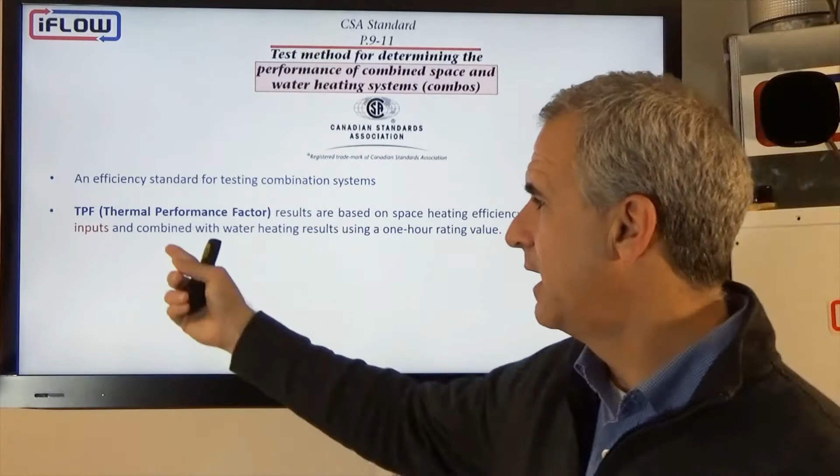First, we'll look at the Canadian test results. In Canada, the CSA has developed a standard for testing combination systems called the P.9-11 standard. It issues a TPF, or thermal performance factor, as a result, which is a weighted value of 3 numbers on the heating side, combined with the domestic water side using the 1 hour rating to give you a combined efficiency number.

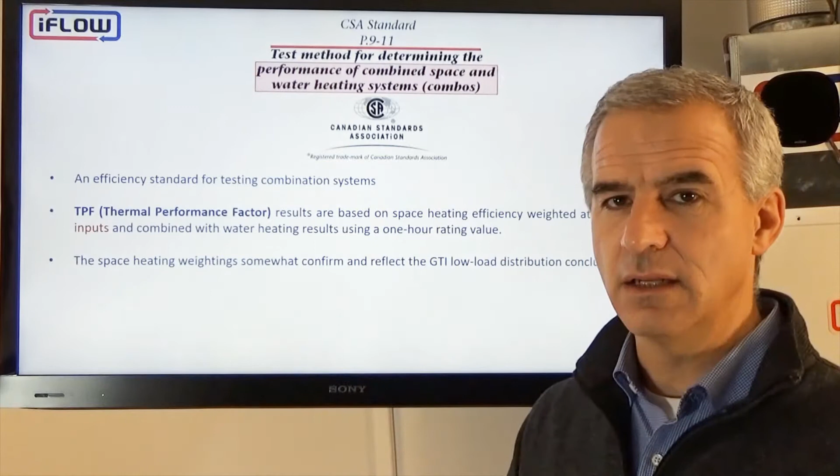So the space heating weightings somewhat confirm what GTI and Natural Resources Canada indicate about distribution and heating loads, in that the efficiency scored when we're running at 100% only weighs for 10% of your total score, because the unit's rarely going to run at that input, since it's so high.

The efficiency that we scored at 40% equates to 60% of our score. So again, we're saying we're going to be running at 40% of our input the majority of the time. And when we're running at very low loads, so 15% of our heating capacity, that will account for 30% of our score. So 90% of our score is below 40%.

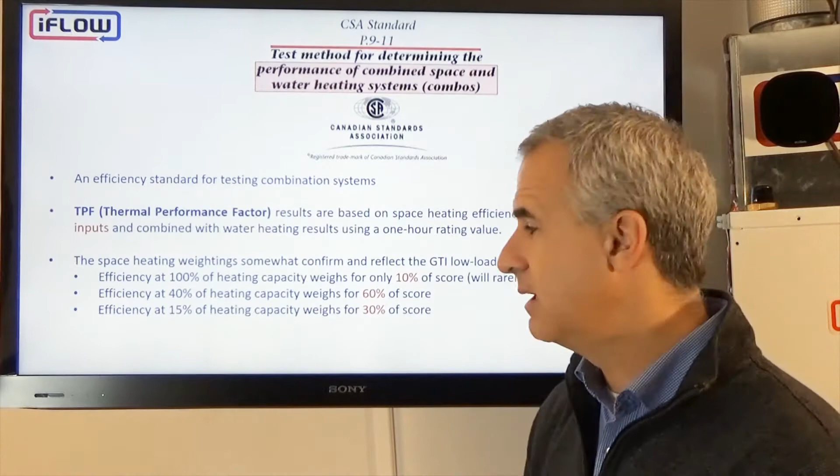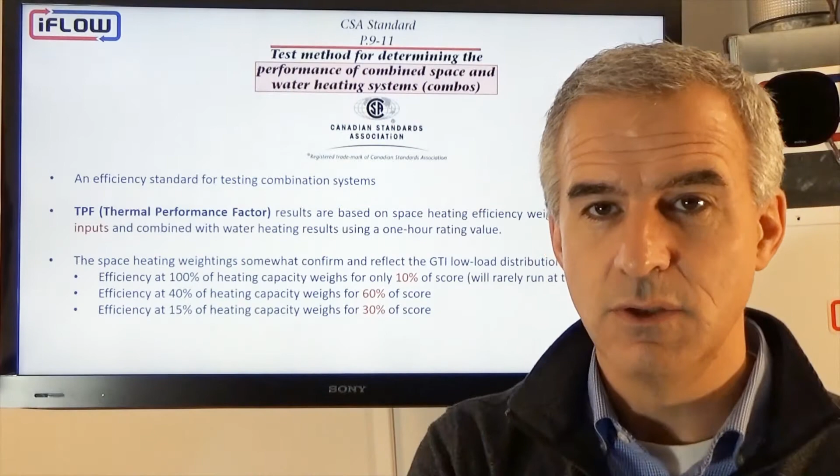40% of a 60,000 BTU furnace, which is the #1 selling SKU in North America, is 24,000 BTUs. So the majority of our score is calculated at 24,000 BTUs and below. This does confirm the GTI numbers, and it does reflect the numbers in the studies put out by the Canadian government.

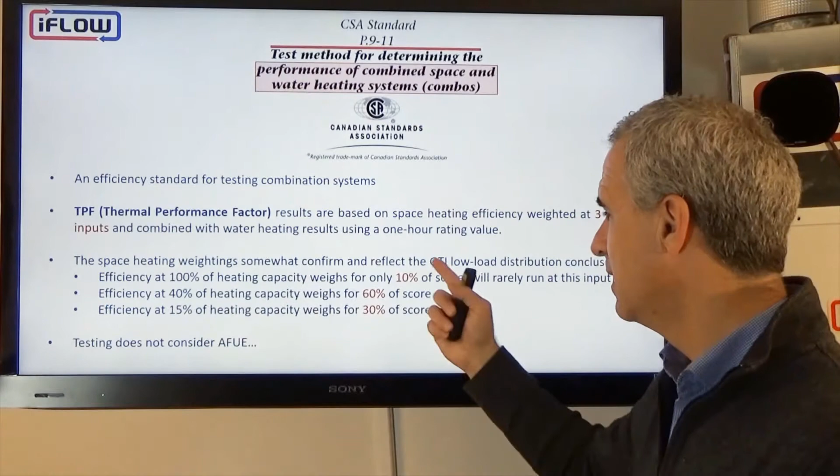So all to say, the TPF number is a balanced weighting of these three scores plus the water heating side. We do not consider the AFUE number much. If you wanted to consider running at 100%, that only weighs 10% of the score. So in these results, iFLOW scored 4 of the top 6 results.

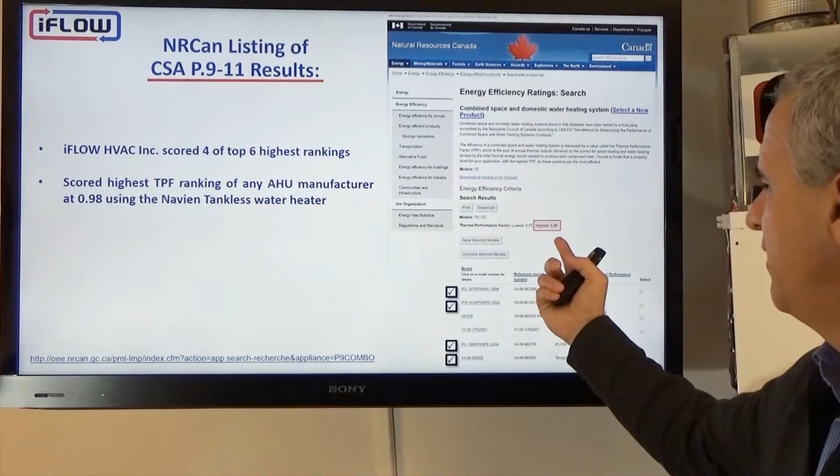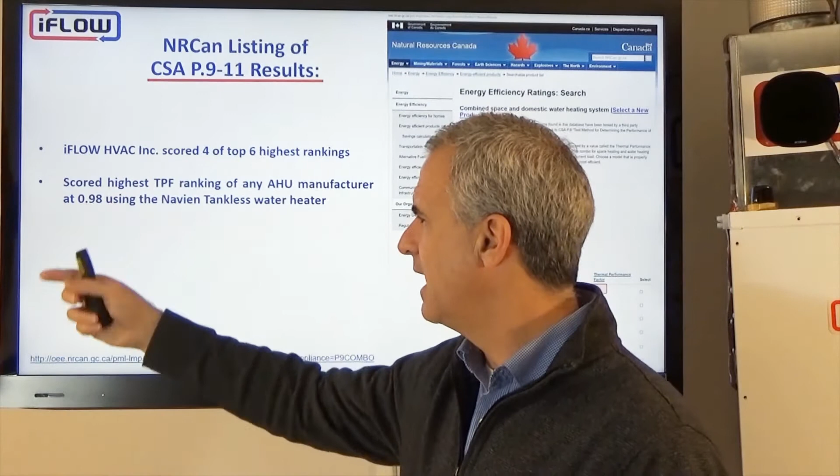We scored the highest TPF of any manufacturer in North America. This is a TPF of 0.98, and that was our score with the Navien tankless, the NP 180A. We scored a 0.98, or roughly 98%, with the Navien NP 180A model.

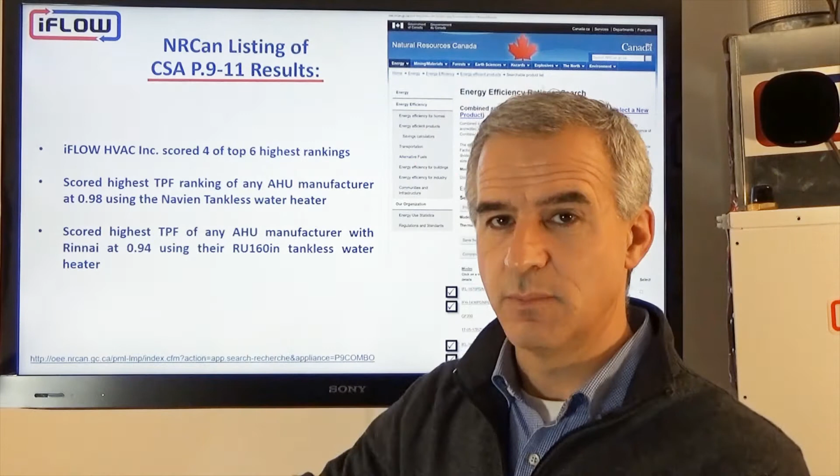We scored the highest TPF of any air handler manufacturer with Rinnai. We tested with their RU160IN model and scored a 0.94, again the highest of any manufacturer in North America. So not only did we score the highest of any combi system in North America tested to the P9 standard at 0.98 with Navien, we also scored the highest with Rinnai of any manufacturer. We're pretty happy with those results.

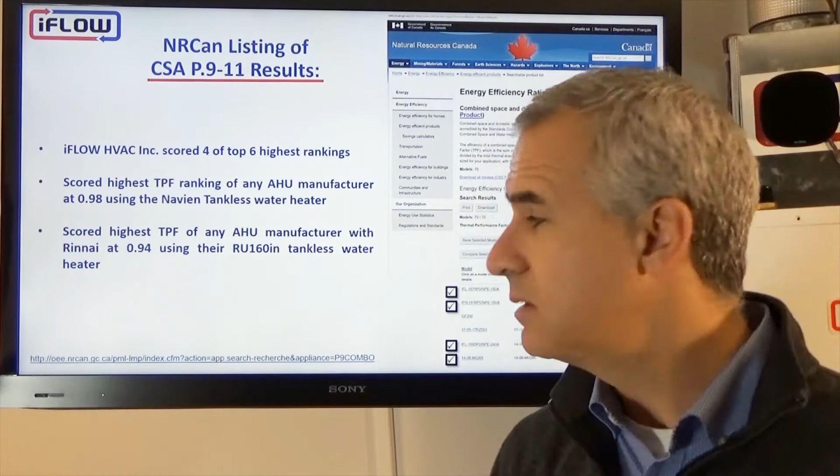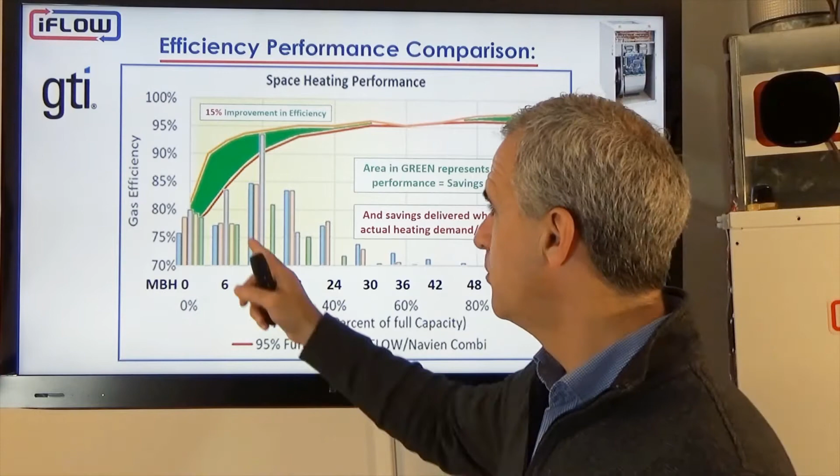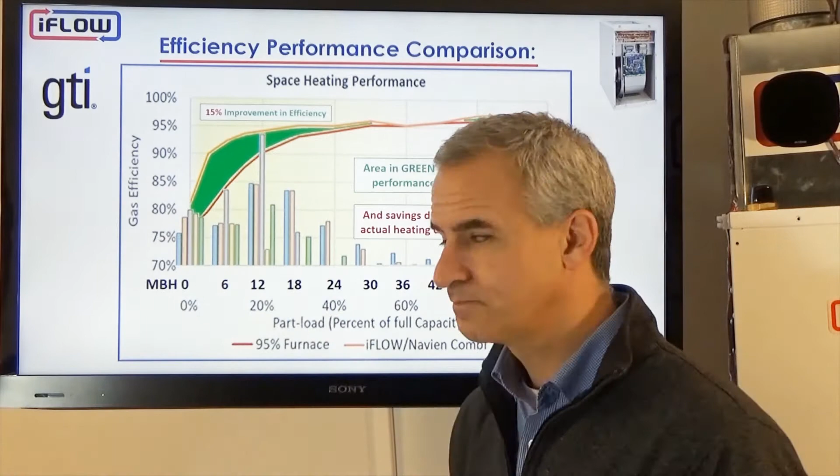Now in the US, GTI has tested our unit. Again, the iFLOW with the Navien NPE-A series, compared to a 95% 2-stage 60,000 BTU furnace, and you see the performance improvement in the curve. Above the red line, we have the yellow line. We're pretty happy about that.

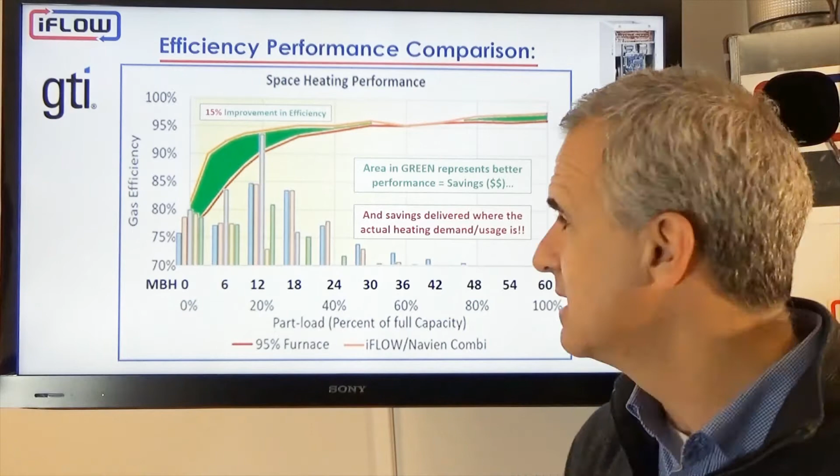So both on the Canadian side and the US side, we're happy with the results being posted and presented. Those GTI numbers are outlined in these tables. We have the gas efficiencies, gas consumption, energy costs, and emissions reduction, greenhouse emissions.

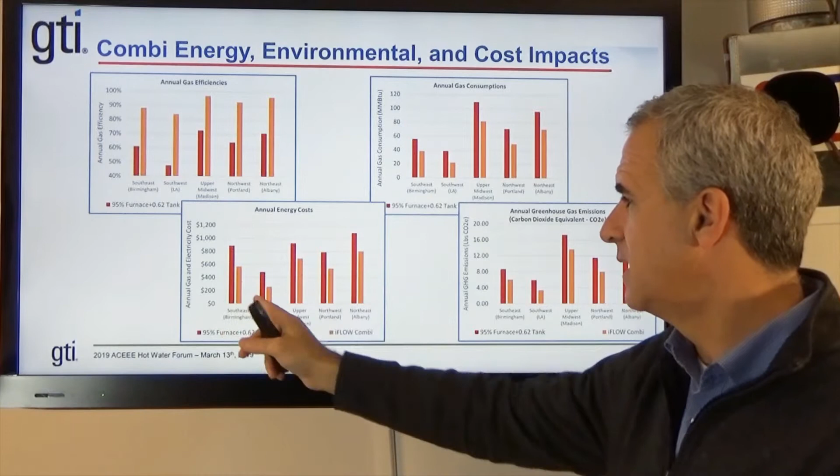The Navien, the iFLOW Navien combination, are in yellow, and the furnace with a 0.62 tank, let's say their standard build, is in red. So you see, efficiencies are obviously higher for iFLOW and Navien. Gas consumption is different. Energy costs are obviously lower with iFLOW and Navien, and the emissions would be lower as well.

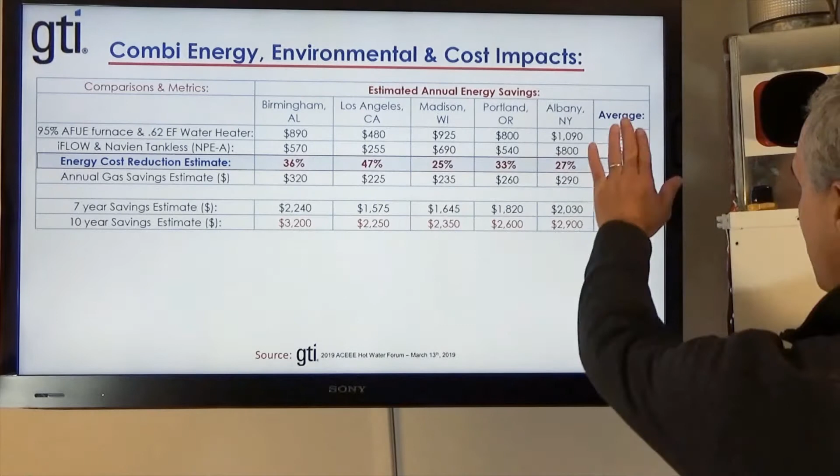So if we take those numbers and convert them roughly into table format, we're looking at each of the different areas: Alabama, California, Wisconsin, Oregon, and New York. If we take the average, we're looking at an average savings of 33%. If you select the iFLOW with the Navien NPE-A tankless and compare it to a 95% AFUE furnace, 2-stage, with a 0.62 EF water heater, you're going to save roughly 33% a year across North America.

So we're not looking at any region in particular. In LA, it looks like you're going to save 47%, but your cost of operating is a little bit less too. So if we take all of the numbers, mash them all together and average it, it's 33%.

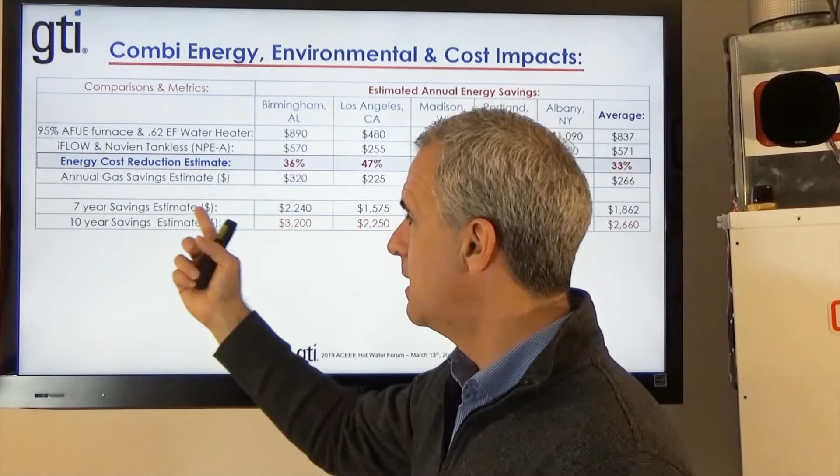So across the US, you would likely save 33%. On a 7-year payback period, that would be almost $1,900 worth of savings, $1,862. On a 10-year payback, we're looking at $2,660. So those are decent numbers.

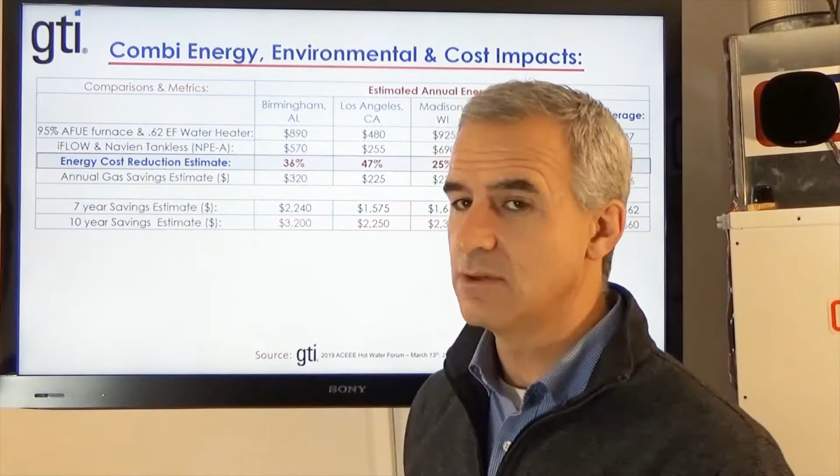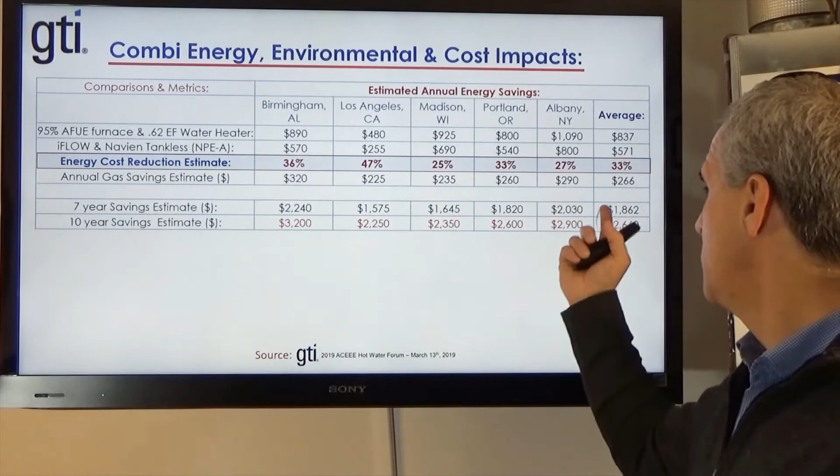And that's over a 95% 2-stage furnace with a 0.62 energy factor. So for all the builders out there, when you're looking at your spec versus potentially upgrading to an iFLOW Navien, you can easily tell your customer: you can expect to save, regardless of where you are in the country, on average 33%, and that's money in their pocket. So they may pay a little bit higher for the home, although we don't think so. For the equipment, the money's coming back to you in the way of payback.

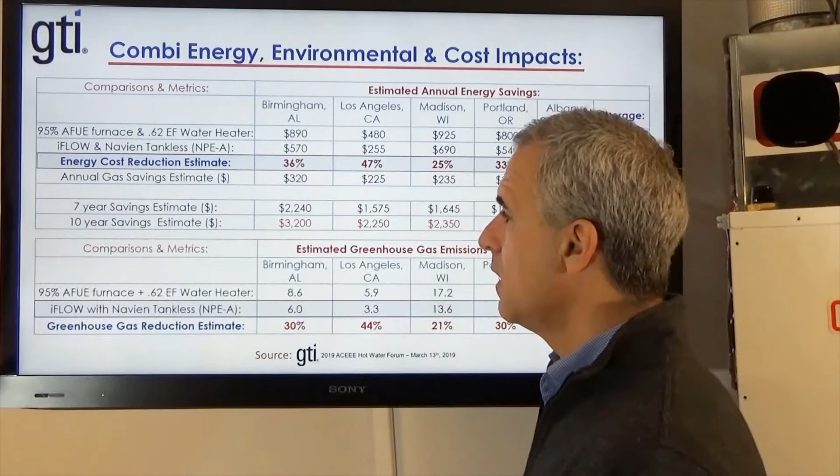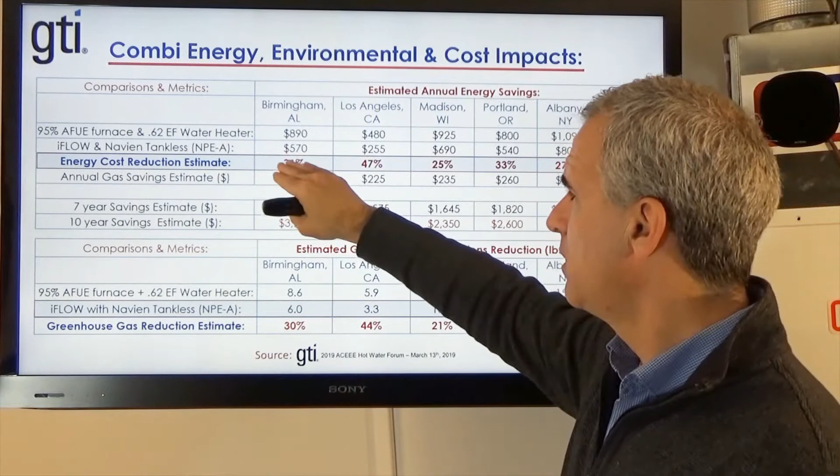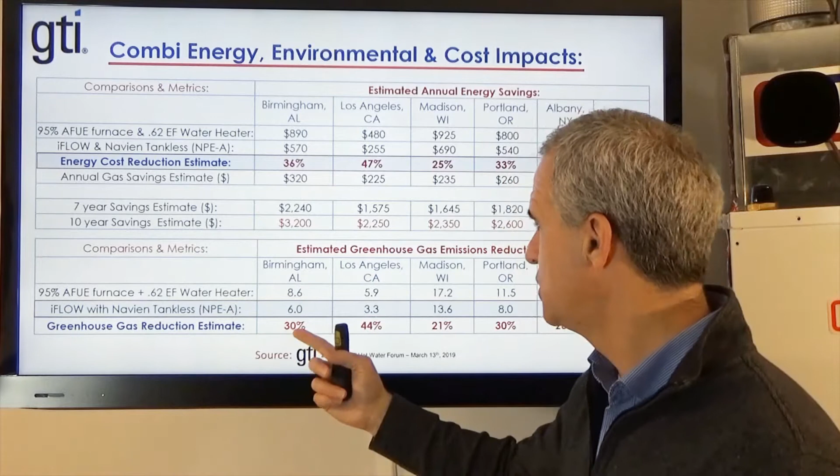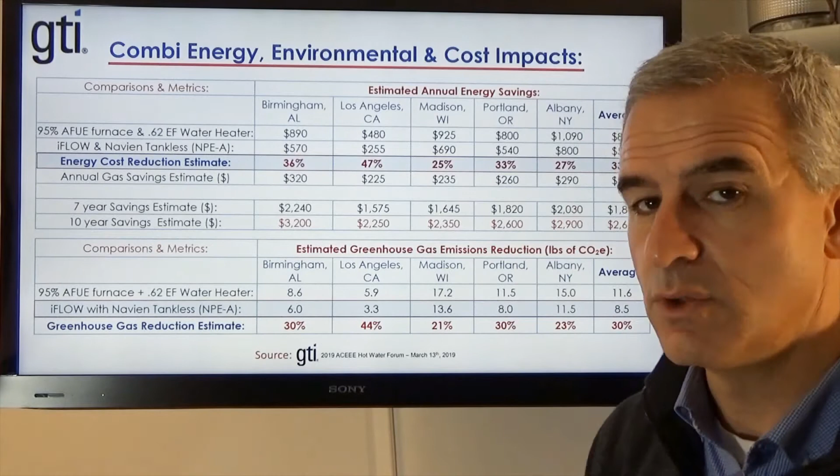In terms of the emissions side, let's look at the greenhouse emission reductions. If we're saving 36% on the gas, for example, in Birmingham, it makes sense that we would see a reduction of the same magnitude roughly on the greenhouse side. Why? Because we're using less gas. If we're more efficient, less gas means we're polluting less, we're not emitting as much. So on average, we're saving 33% on the dollar side, and we're seeing the same roughly 30% emissions reduction in terms of GHGs. So again, that's significant. Not only is it greener, it's going to save you money.

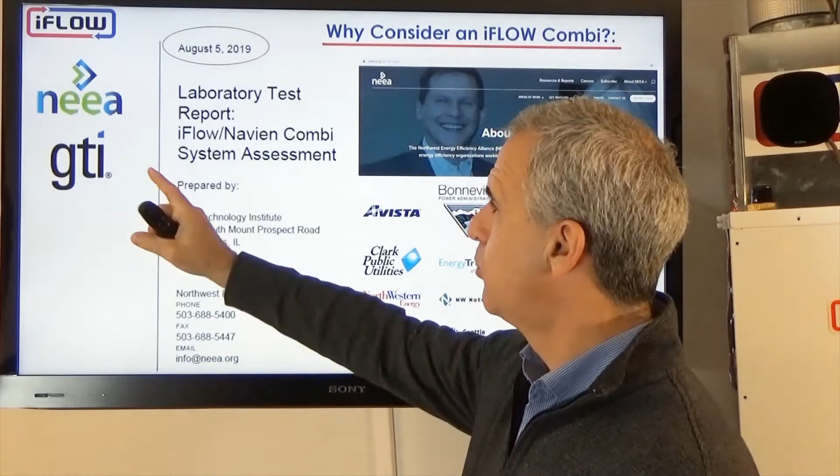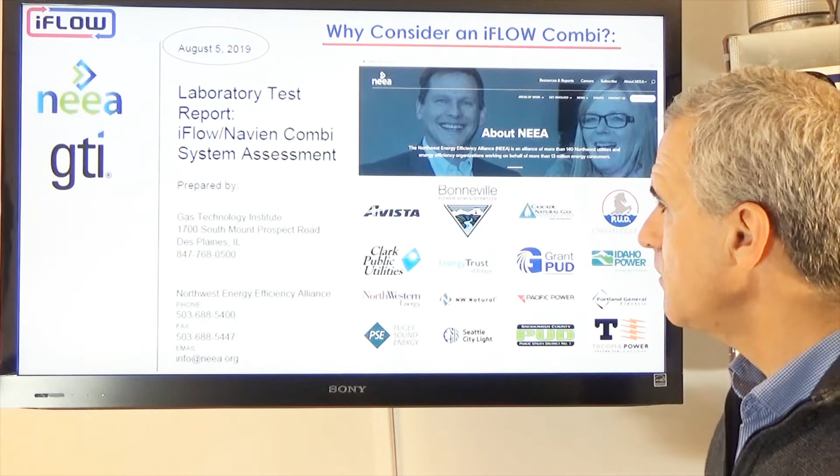So then GTI did a report that was commissioned by NEEA, the Northwest Energy Efficiency Alliance, made up of utility partners and more. They wanted GTI to do an assessment of the iFLOW with the Navien Combi. So what they did is they ran some tests and they basically produced this report.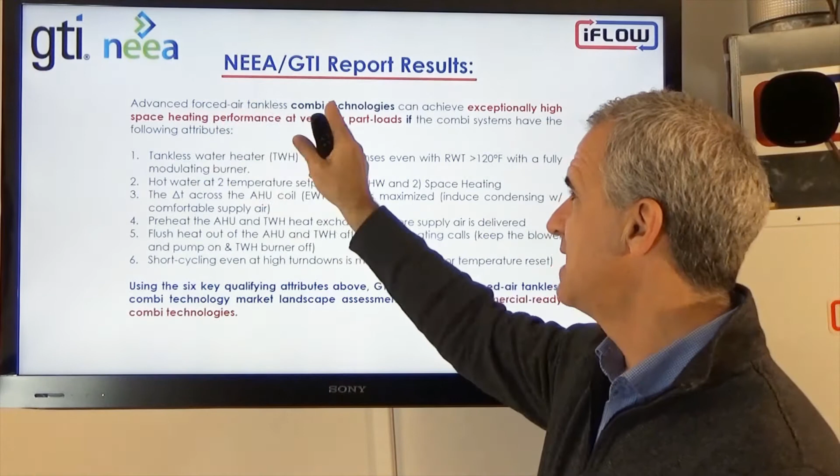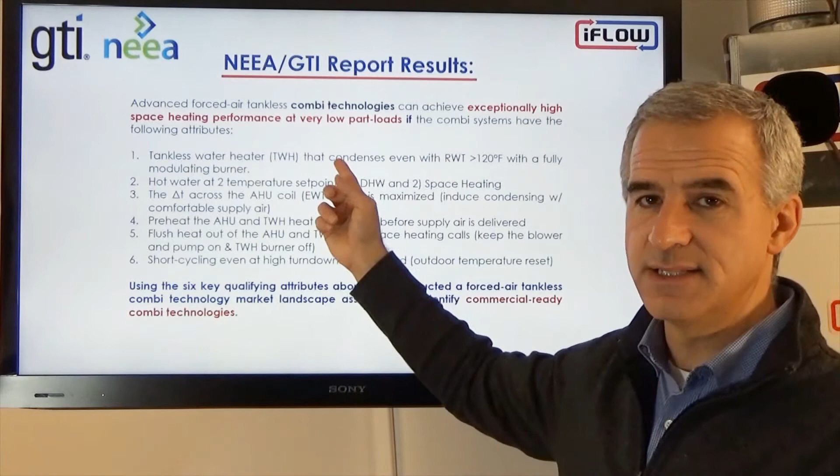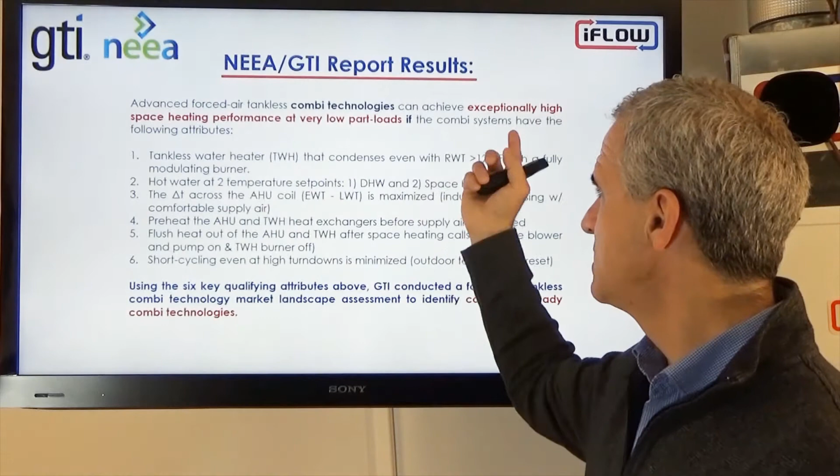This should all be in quotations because it's directly from their report. Basically it says advanced forced air tankless combi technologies can achieve exceptionally high space heating performance at very low part loads if the combi systems have the following attributes. Attribute number 1: the tankless water heater has to be a condensing tankless that condenses even with return water greater than 120. So you need a great secondary heat exchanger with a fully modulating burner. Most tankless units have the fully modulating burner already. It's the return water temperature — the better your condensing heat exchanger, the better the number will be.

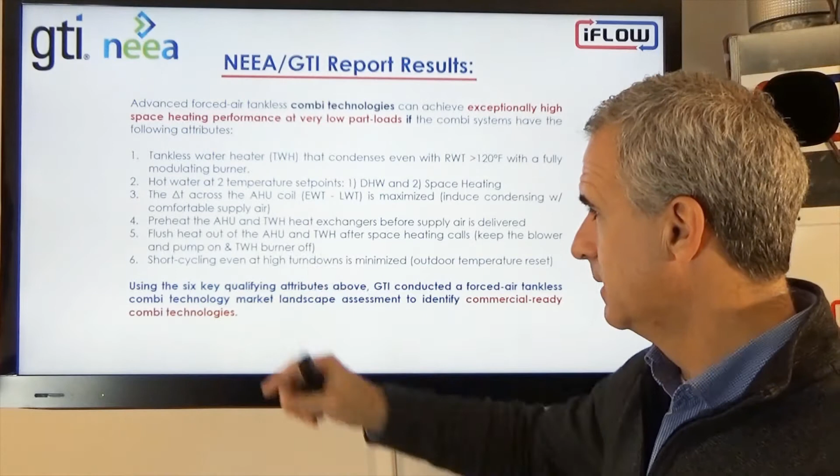Then you have to have 2 domestic water set points — you have to be able to set the domestic water at one temperature and then operate the heating at a second temperature. Number 3, the delta T, or the temperature difference across the air handler, needs to be maximized, so we can induce condensing and have a comfortable air temperature.

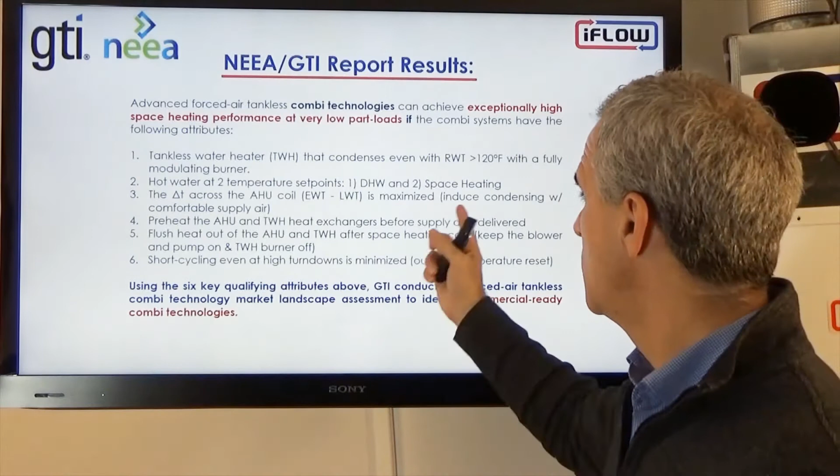So at iFLOW, we do — that's what we focus on. We maximize the delta T across the coil by controlling the fan speed, and we control the pump speed.

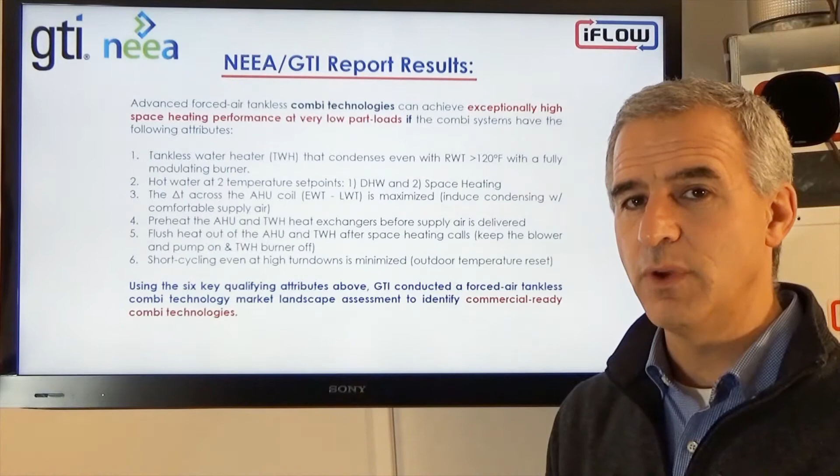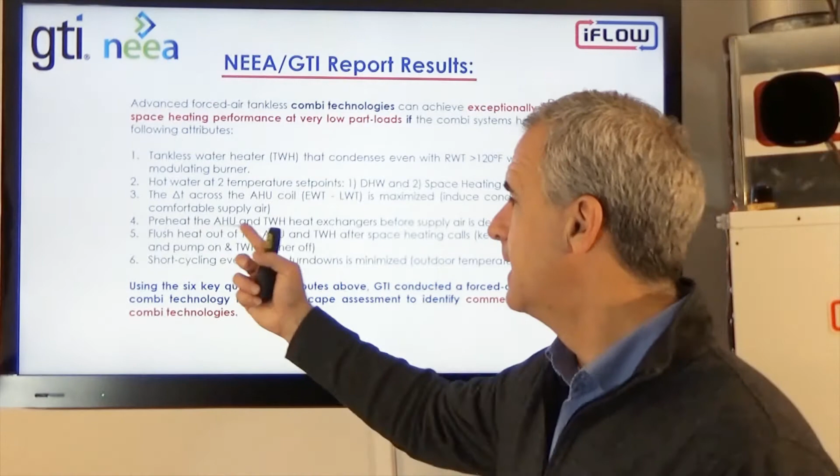Number 4, preheat. This is basically addressing that before we start the blower, we want to make sure that the tankless has supplied heat to the coil. So we'll wait until the coil is warm before we start blowing the air across the coil. That's the preheat.

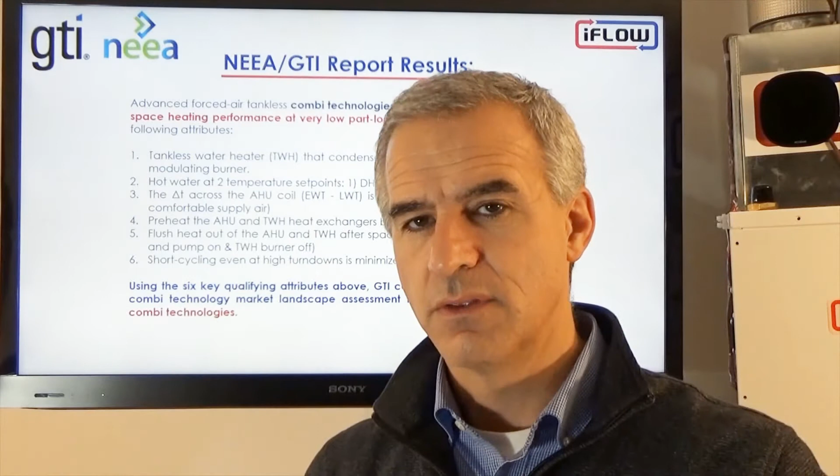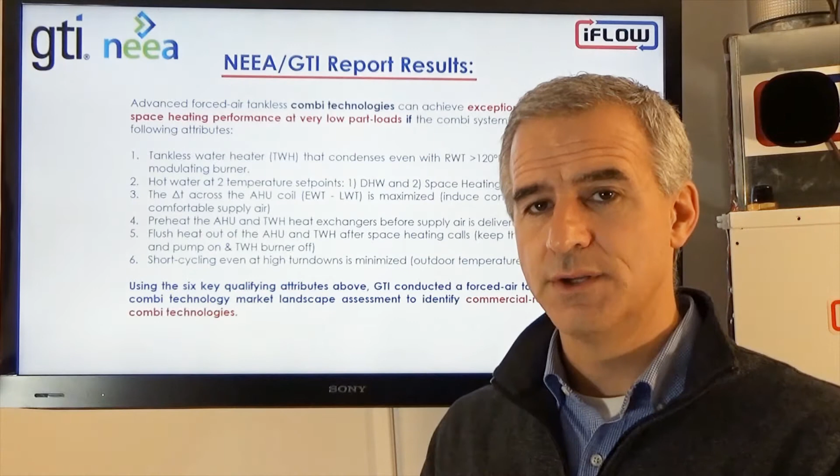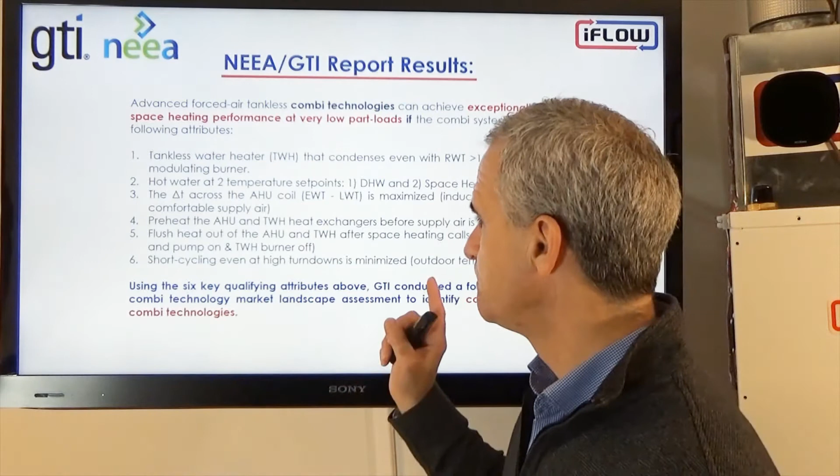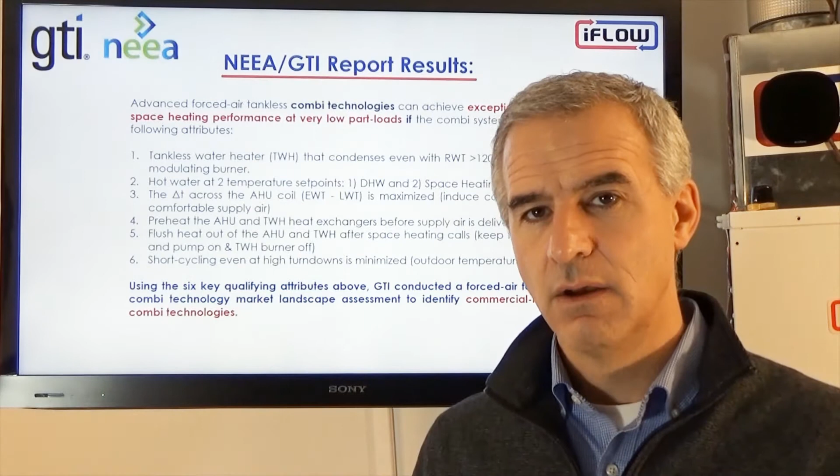And then the opposite — when we're shutting the unit down, let's say we've been running in heating mode, the thermostat is satisfied and tells our unit to shut down, but we know there's still heat in the coil itself and in the tankless water heater. So we try to pull that heat out so we don't have to exhaust it out the flue as wasted heat. We run the pump through, and we run the blower at low CFM to scrub the last bit of heat off the coil and out of the tankless, delivering it into the space. So we're basically delivering all the BTUs they've paid for into the home and not wasting anything.

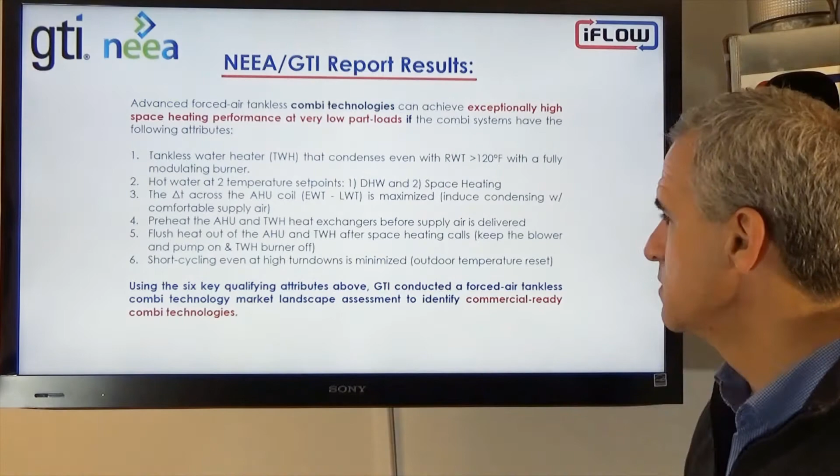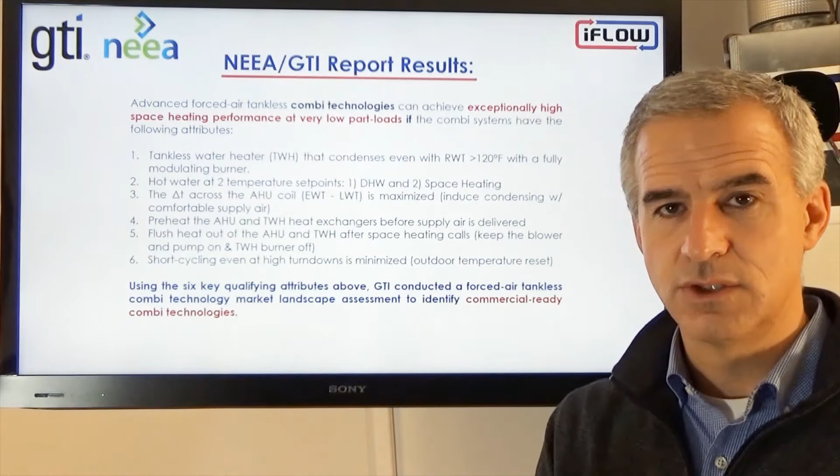And then short cycling, even at high turndowns, is minimized. We want to minimize the cycling, and that's what we've been talking about through most of our video series — matching the minimum load to the minimum input of the appliance to the minimum heating load, so we can minimize that short cycling.

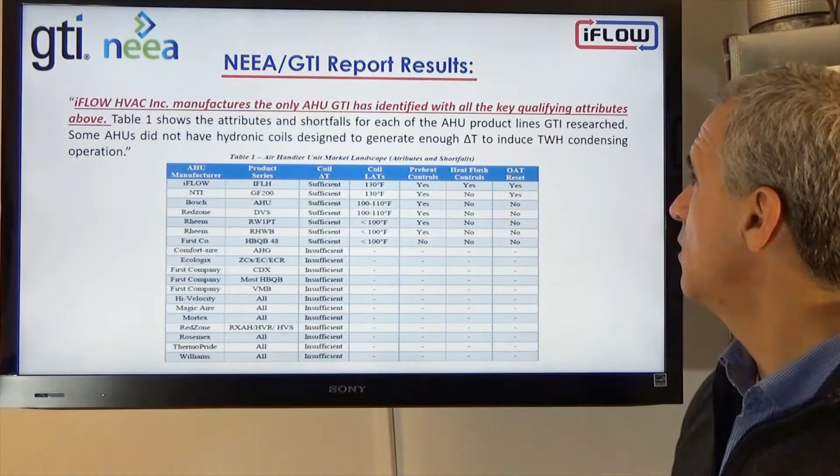So their conclusion for the report is that iFLOW manufactures the only air handler unit that GTI has identified that uses all 6 of the key attributes. So table 1 shows the 6 attributes.

Some air handler units did not have hydronic coils designed to generate enough delta T to induce full tankless water heater condensing. Some of the units weren't managing the delta T enough, so the delta T was too small. When the return water temperature going back to the tankless was within a certain degree, it really wasn't fully condensing, so their efficiencies were low.

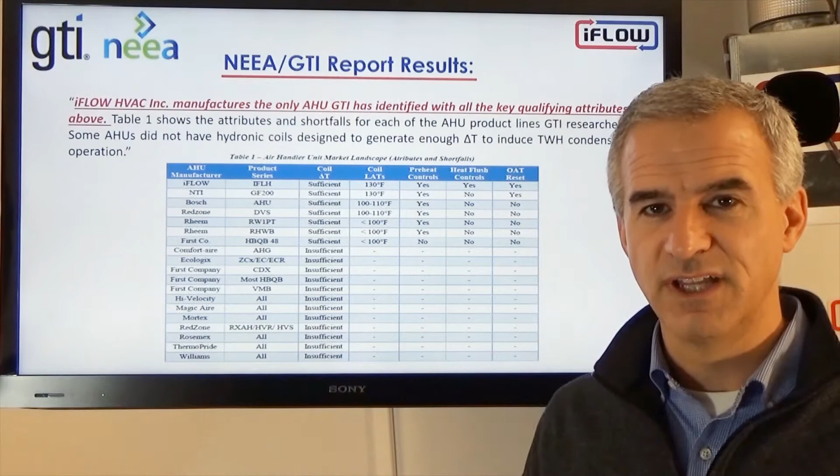So we scored at the top. We're very happy about those results. Not only were we supplying sufficient delta T to condense, but we're also supplying at a decent warm air temperature.

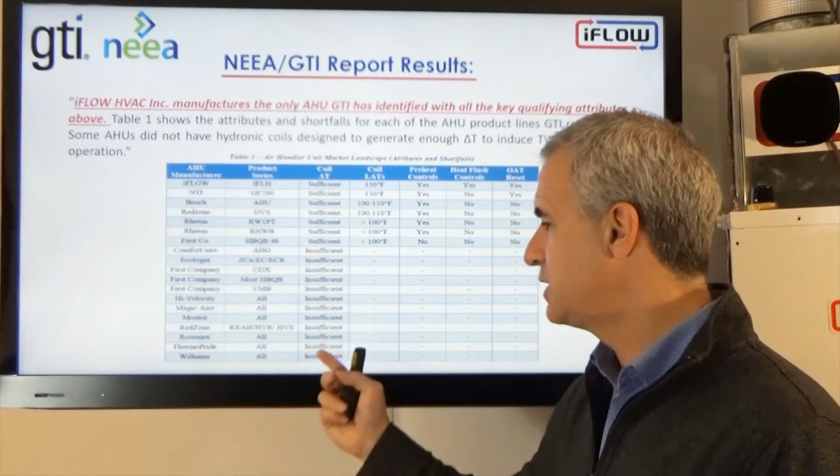If you look at the other manufacturers on the chart, many were insufficient to get the condensing, and that means your system's efficiency is not going to be in the condensing range or sufficiently condensing, which means you're probably 87% or lower on the heating side, and that's not a great number.

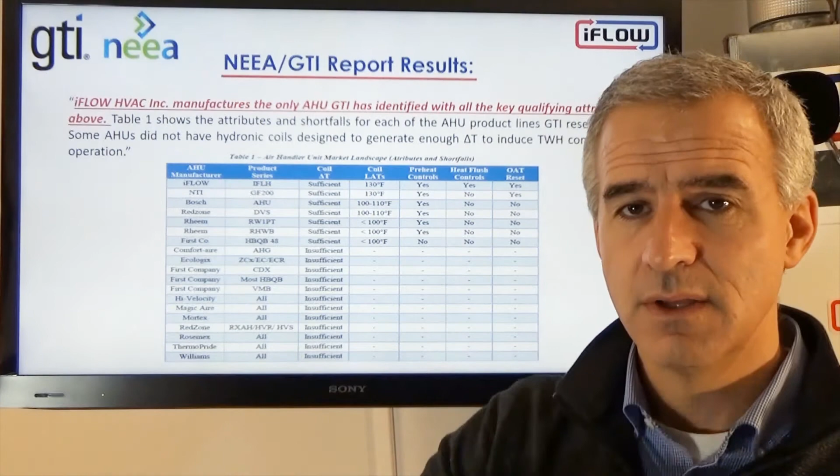For these that are sufficient on the coil, if you look at the distribution air temperature, the LAT, the leaving air temperature off the top of the coil, we're delivering at 130 degrees. So when the homeowner feels that temperature at the register, they're going to be comfortable. They're going to like that heat.

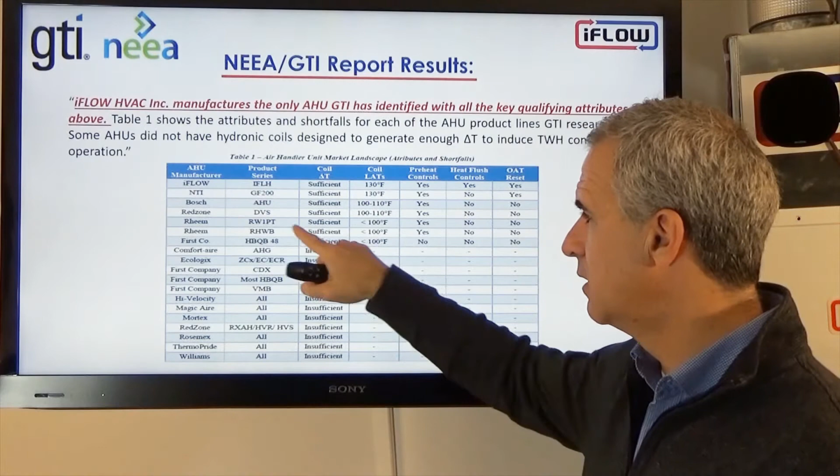Some of the others are very low. If you look at these 3 units, you're well below 100 degrees, which means the delivery temperature at the register in the home is going to be much lower than the homeowner is used to. It's still delivering BTUs, no question there, but it's going to be at a lower temperature than the homeowner is used to.

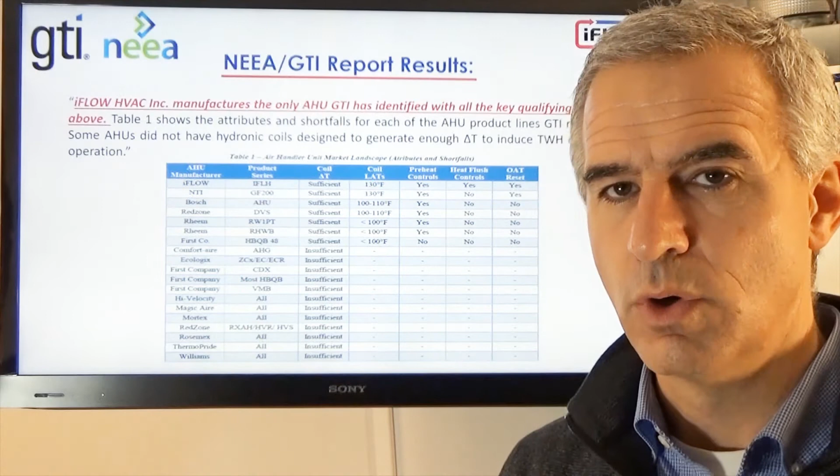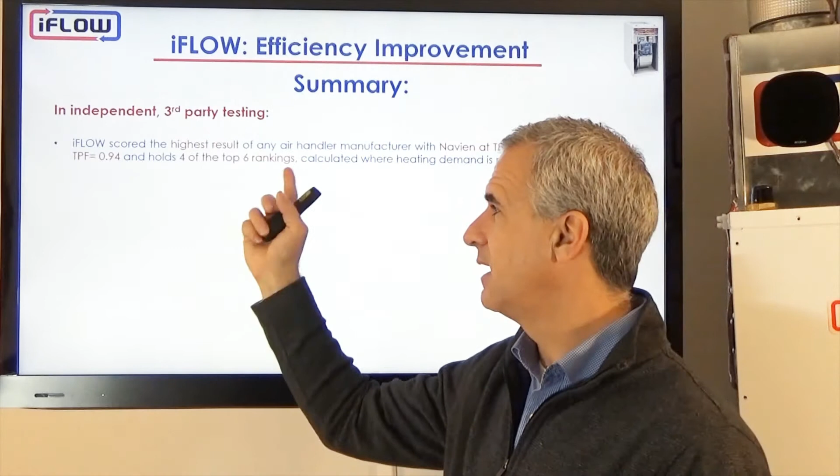So the summary: in this independent third-party testing, iFLOW scored the highest result of any air handler manufacturer in North America. When we tested with Navien, we scored at 98%, and with Rinnai at 94%. And again, we hold 4 of the top 6 rankings in that CSA P9 testing category.

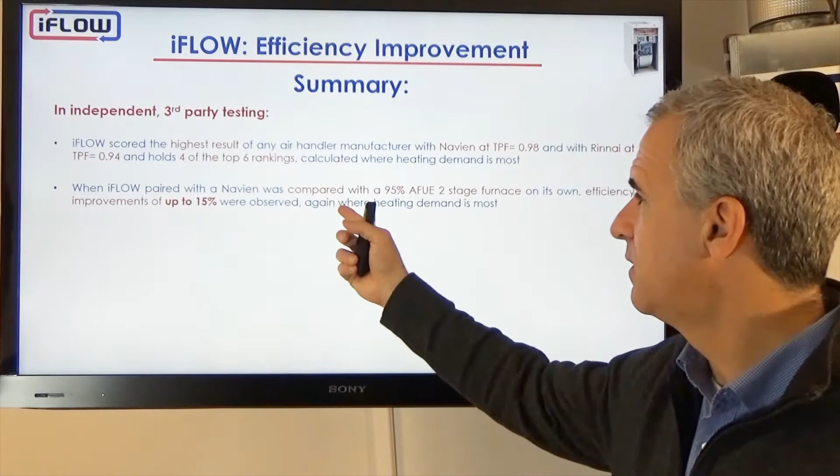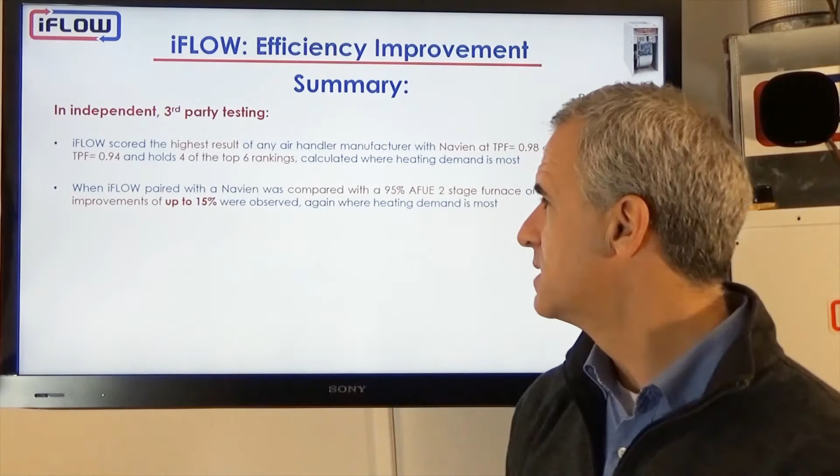When we paired the Navien with the iFLOW, and compared it to that 2-stage 95% furnace, efficiency improvements up to 15% were observed, where the heating demand is most, and that's key.

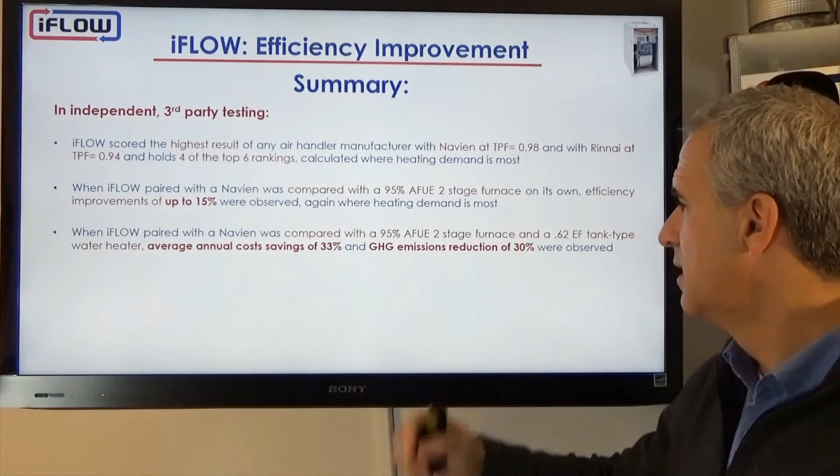When we paired that 95% 2-stage furnace, or when we paired the iFLOW with the Navien and compared it against that 2-stage 95% AFUE furnace, with a 0.62 EF tank-type water heater, we had an annual cost savings of 33% and greenhouse emissions reduction of 30% on average across the US, in all 5 different locations that they simulated.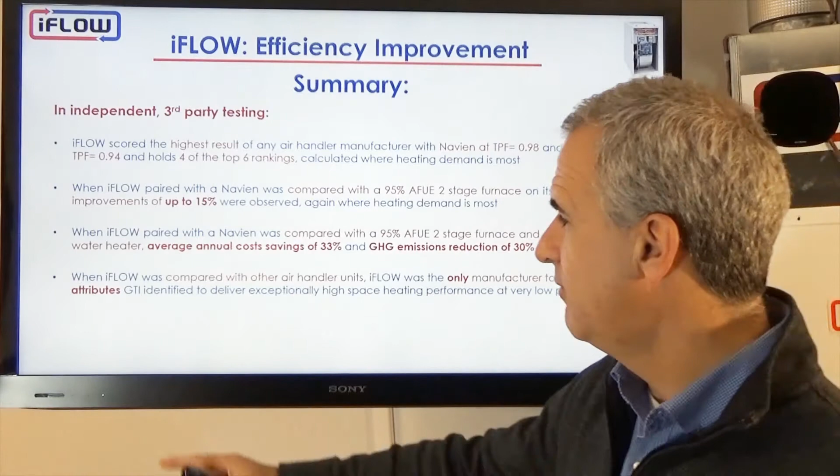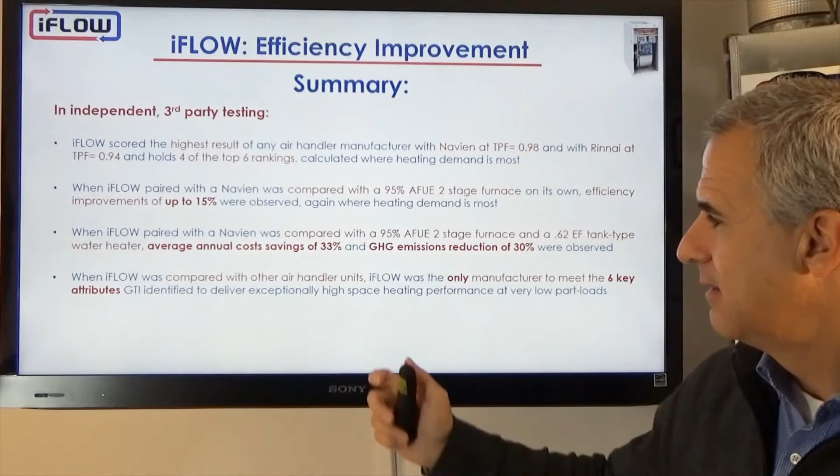And then when iFLOW was compared with other air handlers in the market, iFLOW is the only manufacturer to have employed the 6 key attributes that GTI identified that were able to deliver exceptionally high space heating performance at very low part loads. So that's the summary of the third-party testing.

We're pretty happy with those results. I think if you look at the results in Canada and the results in the US, they're saying the same thing: that we're getting very high efficiencies when we pair with the Navien or with the Rinnai.

I think we can do the same thing with any combi boiler that has an AFUE of 95 and a very good low minimum input. We could probably even get into this gold area.

So I look at this gold area as kind of our gas industry R&D homework, right? If we can get up into this area, that would be an improvement. If we can get such that we're delivering at 6,000 BTUs, but we're delivering at 97, 98%, that would be ideal. So we have some work to do.

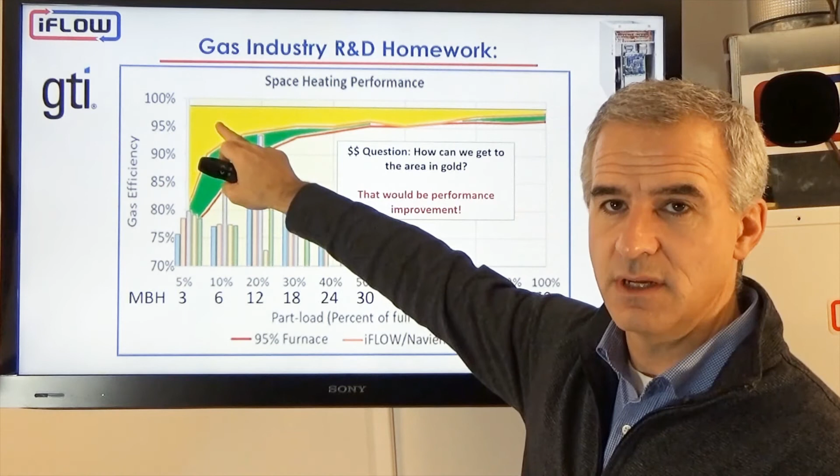I think when we pair the iFLOW with a low input boiler that can modulate down to 6,000 BTUs at an AFUE of 95%, we could easily hit this range, this number, or maybe even a little higher. So we can do better, and we will continue to strive to do better in our development and testing. But so far, we're happy with the results.

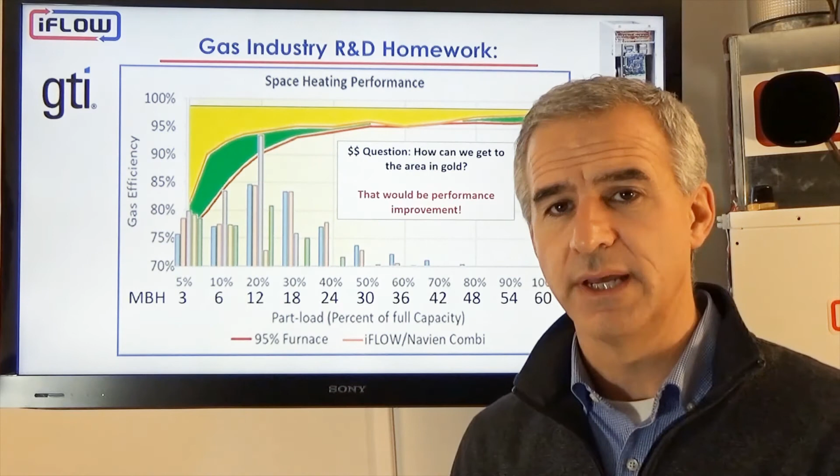What I do want to say is that when you, as a homeowner, are considering which appliance to go with, I think these results show that the iFLOW in combination with an appropriate heat source can actually perform better than your furnace in many cases. So don't discount it because it's a combi system. They can be very, very efficient. They can be great performers.

Again, we can do the zoning and the modulation, so we get the full modulation with our zoning package. It could be a great comfort solution for your home.